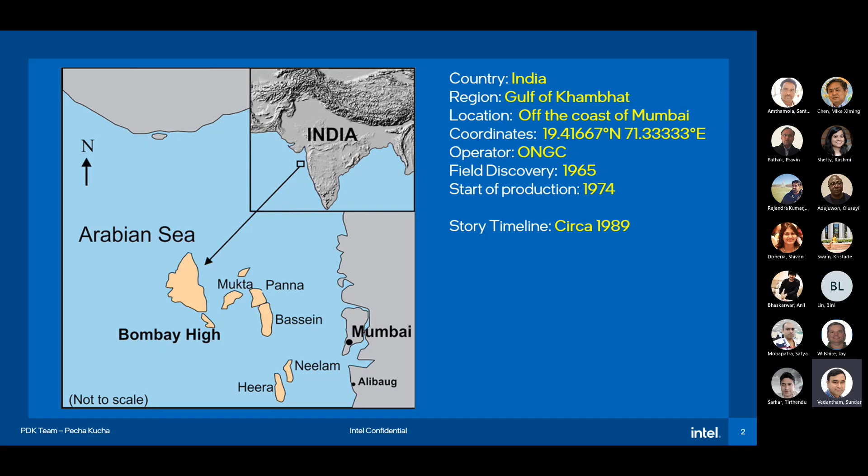Okay. So at the time, I was working for an oil and gas company in India called ONGC, Oil and Natural Gas Corporation, in an offshore oil field that's like 100 miles west of current Mumbai city. It was known as Bombay in those days, and so the oil field was called Bombay High Offshore Oil Field.

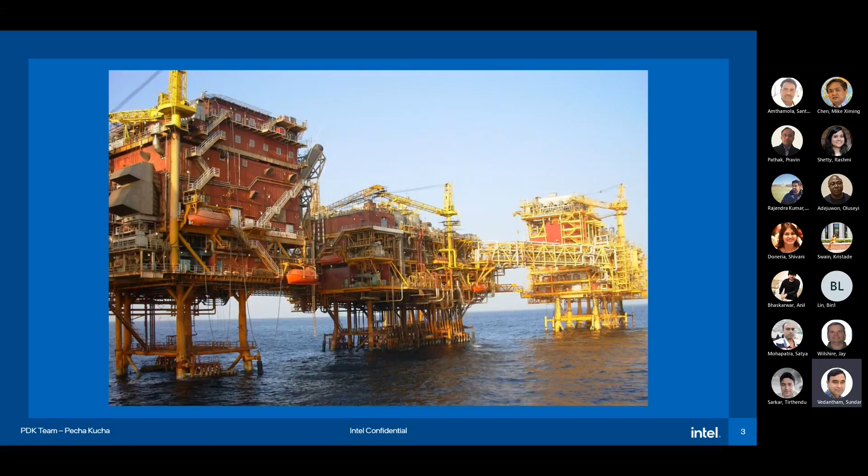Right, so a helicopter used to carry us from the Mumbai heli base on Fridays and drop us off on this platform. So about 100 of us used to live and work there for 2 weeks. It'd be like 12-hour shifts, so no Saturday, Sunday holidays. Then we'd get 2 weeks off so we can go home. So you might have seen these kinds of offshore pictures. They usually have a heli deck and then multiple blocks where engineers and workers live.

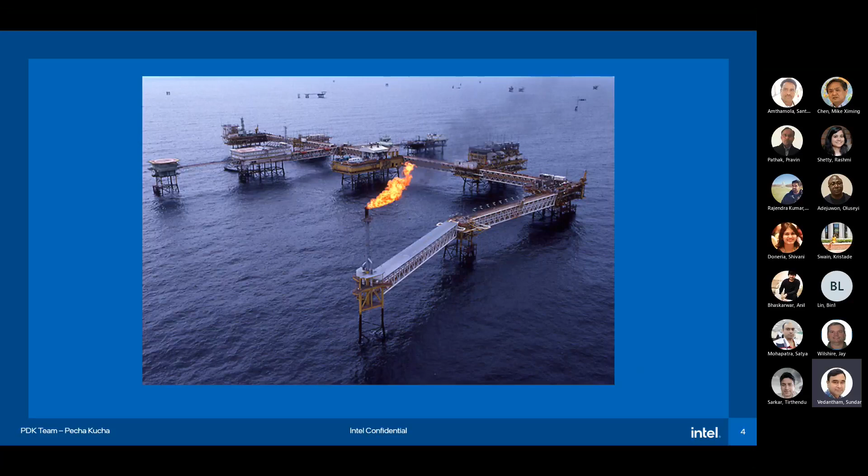And then as you notice, it'll always have a flare that continues to burn 24/7, burning a small amount of natural gas. People always wonder, right? So why do we waste this gas and can't we save and use it? But in reality, it's quite difficult and it's not cost effective. But another more important reason is safety, as it burns off small amounts of gas that collect in various stages. So it reduces fire hazard in the platform.

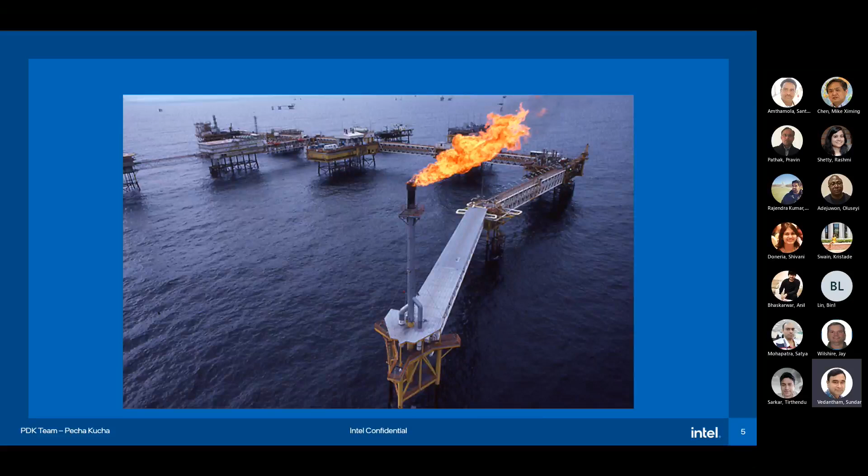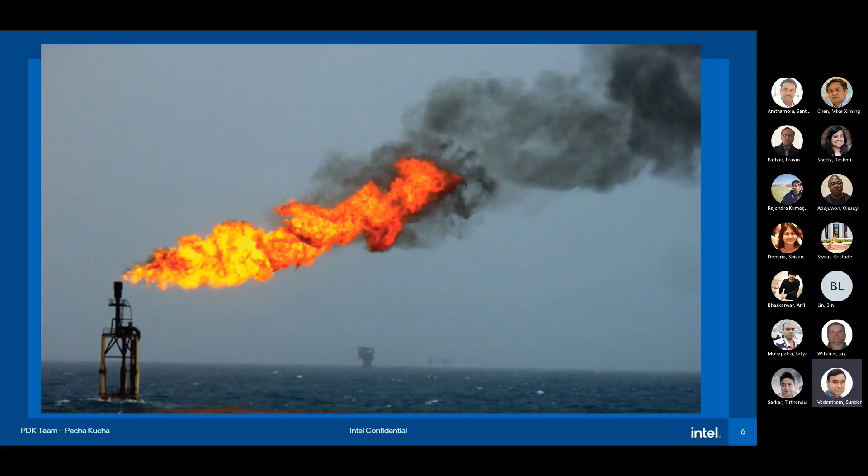And so in reality, we burn only less than 1% of the gas that is unearthed. And there are efforts in the industry to reduce it to zero by 2030. But during my days there, if the flame size is normal, that indicates all is well in the platform, right? So if it becomes too big or small, we'd immediately call the control room, since we were maintenance engineers, to make sure everything is running okay. So that's a sign that things are running well if it's burning normally.

So though it may not be obvious, the flare tip is rather big. It's like 10 feet diameter, right? So people do PhDs in these designs to make sure it's efficient, all gas burns off, there is no carbon residue dumped into the atmosphere, and so forth. So there's a lot of technology involved.

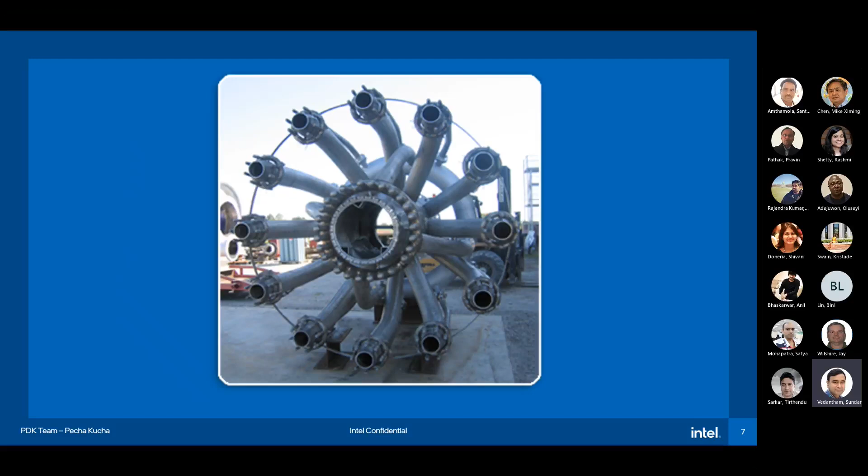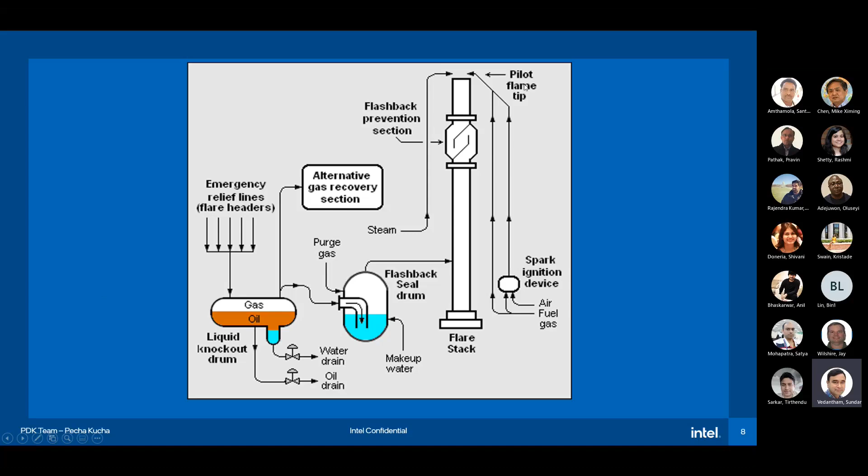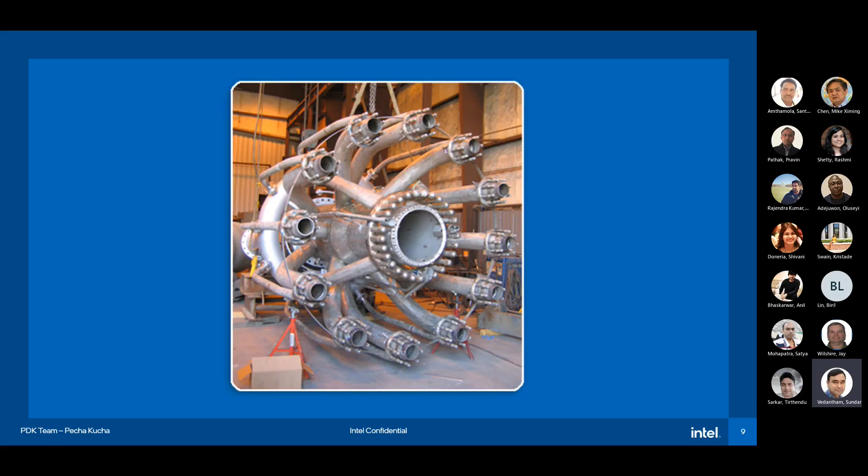So the platform is initially started, then the flare starts burning. There are supposed to be routine maintenance checks to make sure everything works well, pilot flame is on, triggering works, and so forth. But when I was there, slowly the flame started looking a bit odd. You can't really go close to check it out because it's too big, too far away. But when we were looking one day, suddenly the flame just went out.

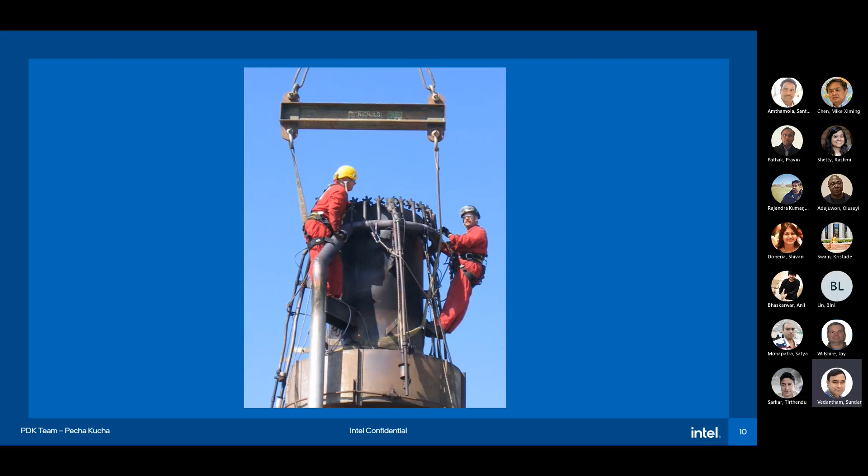Right? That's really dangerous, as you can imagine, because the gas started collecting around the platform. So the safety engineer got panicky. He was asking for our instrumentation team's help. We went to the ignition panel and tried starting it by triggering it. Nothing worked. And then we slowly realized after like 8 years of continuous burning, this tip was all burnt and had fallen into the sea. Right. So there is no way to actually start that thing.

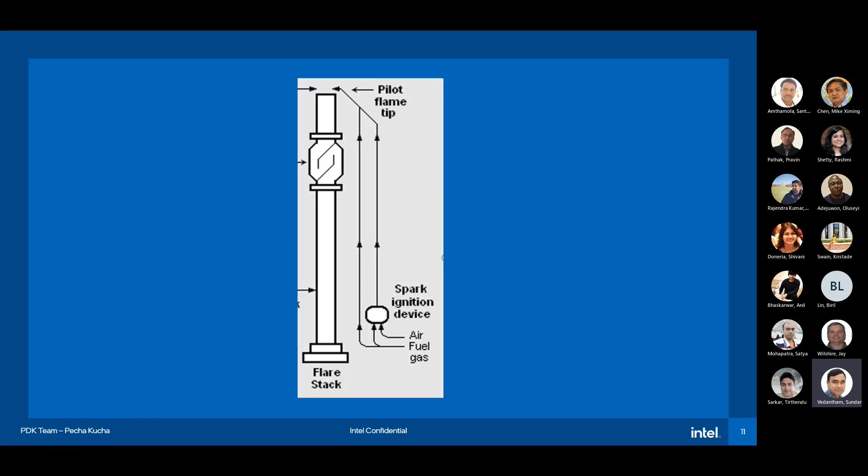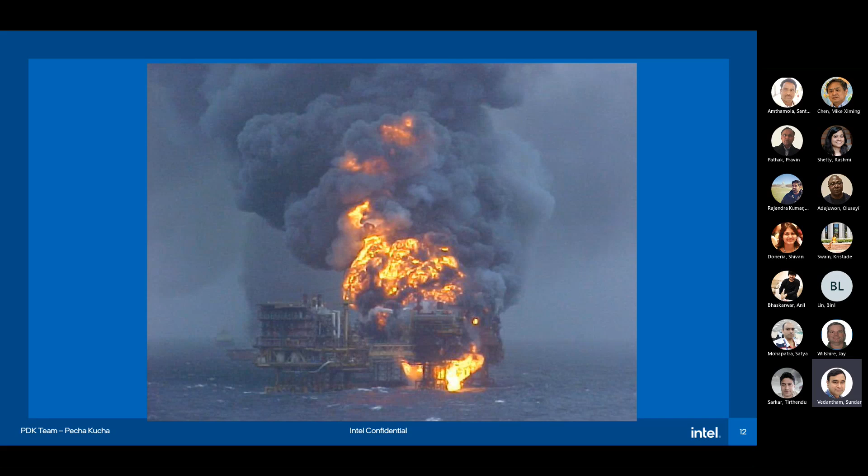But if we just leave it like that, gas can start accumulating around the platform, and some simple spark can just blow up the whole platform. Since it's full of oil and gas, it's like a sitting bomb. So engineers were kind of okay, but the kitchen staff, contractors, they all got really panicky and started yelling and saying we should abandon the platform and go back to Bombay. We didn't know what to do.

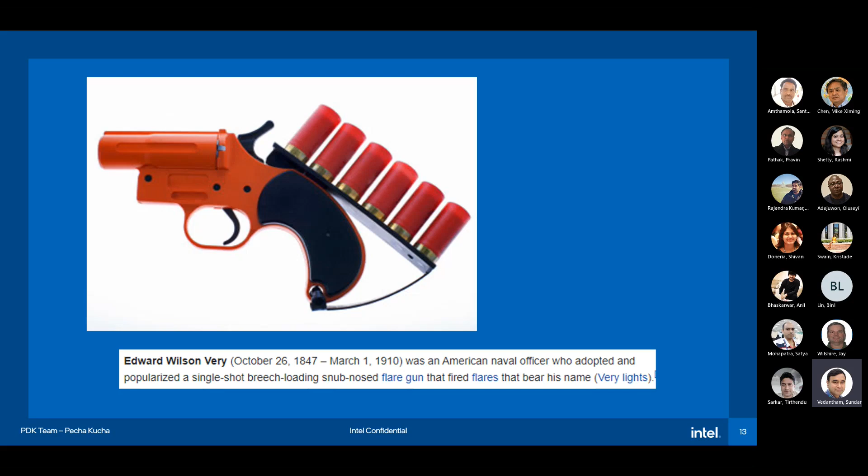Then finally, we came up with the idea of using this thing called a Very pistol to restart the flame. It's actually designed to shoot flares in emergency. It's not meant for restarting a burnt out flare stack. When we looked around, we figured nobody had fired this flare gun either. So since nobody had fired it, I thought I am as good as anyone else, right? So I volunteered to fire it.

And it's not appropriate to fire it from the platform. So we had to get on one of these boats, go close to the stack, and then fire it from there.

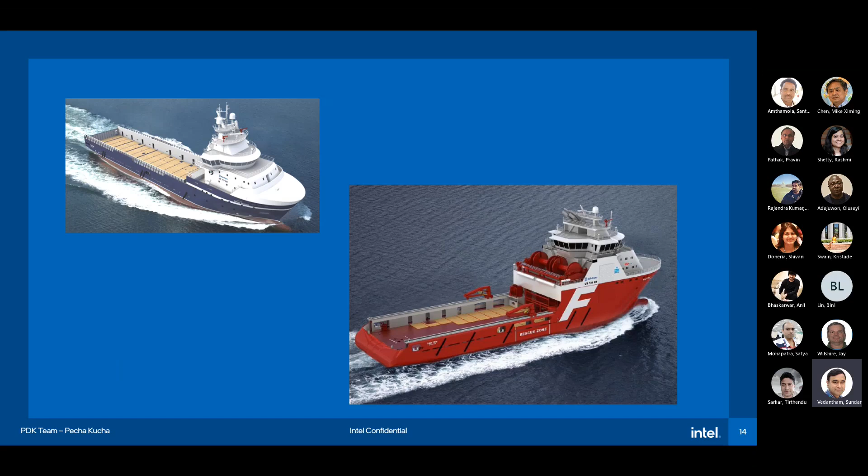And in these platforms, since we usually come through the helideck, there'll be no docking station for a boat or anything. So you need to get on one of these baskets, and then the crane will lower you down to the boat. So I clearly remember a colleague of mine called Gurudev Singh. And then the two of us got on and then got onto the ship.

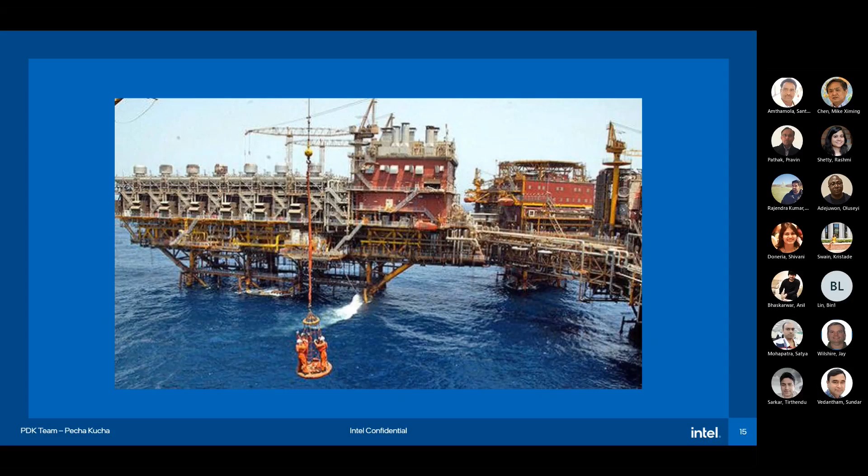So standing on the ship deck, I had a walkie-talkie, so I could talk to the control room. So the ship captain took us to the upper side of the wind flowing down from the flare, right? So I positioned myself, asked the control room to open a lot of gas. And then I just fired the gun. There were like 60, 70 people watching me from the platform.

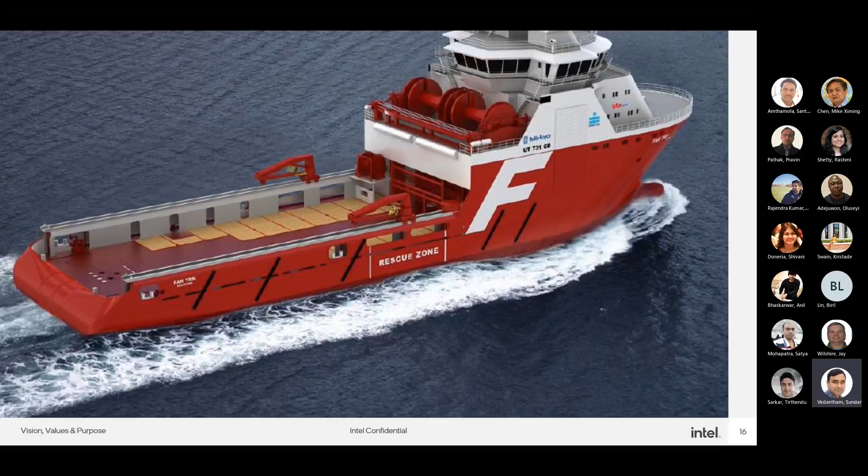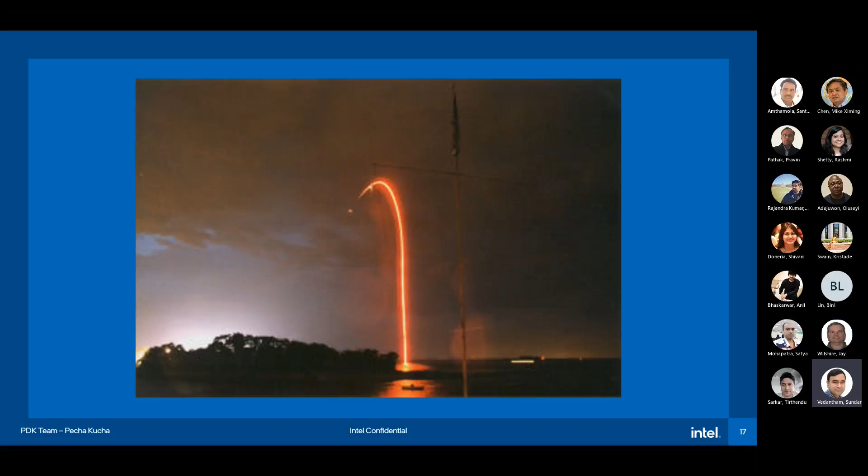Since it was kind of late in the evening and the sun was setting, it was getting dark, I can clearly remember that big sound like flat, and then the red kind of fiery line going sort of in slow motion, like from my hand to the flare tip, and suddenly with a very loud noise, the flare came back to life. So I heard a lot of people cheering and clapping for us from the platform.

So you can see where that boat is approximately. So this is the flare that went off. So we have to shoot from here. So when the control room adjusted the gas flow again down to normal level, it went away. So we had to actually fire a couple more times. And I think finally what Gurudev Singh fired, that's the one that kept the flame on. And we asked them to keep the flame going.

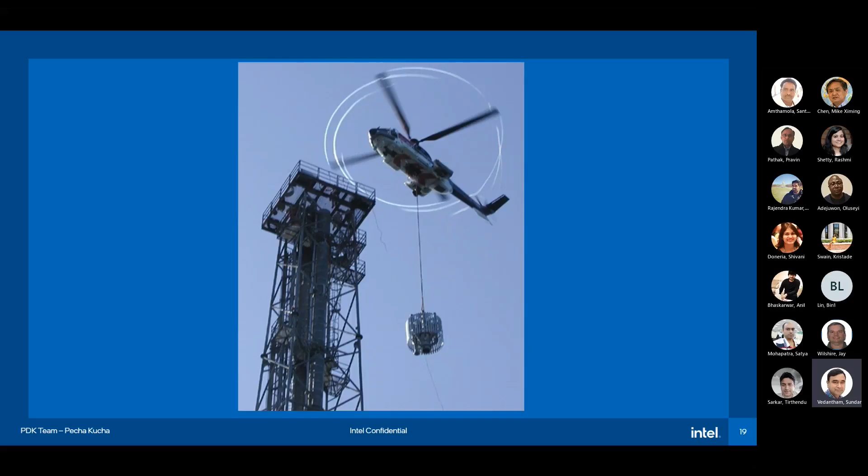When we returned to the platform, we were treated like astronauts kind of thing. Everybody cheering us for a couple of days. Then my shift got over, I went home. The company brought a replacement tip and mounted it from a helicopter. The next time when I went back, it was all well, and the flare actually even looked better than before.

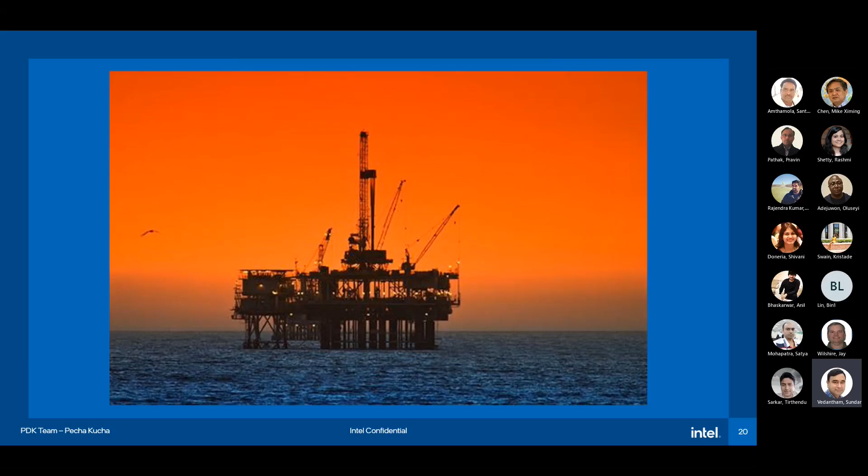So though the platform is inherently a dangerous place, offshore platforms are an engineering marvel, right? So I was like 22 years old at the time, so I had a bunch of such experiences that gave me a lot of confidence to kind of take risks without worrying too much about failure. Because in this case, if it had failed, okay, I didn't lose anything, but it worked out well. And so I was treated like a hero for a couple of days.

That was it. Wow, that's so great. It's completely like a cinema, like a movie. Very nice, very nice.

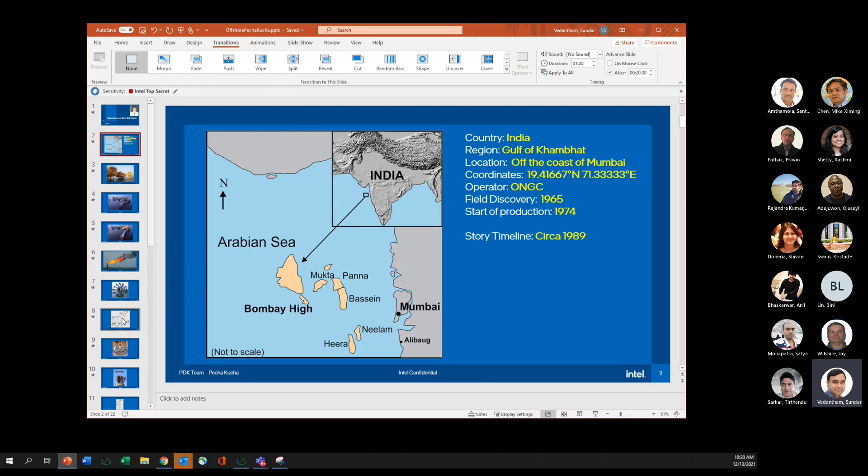Very good. So what I still don't understand is why do they have to have the flame? Is it because they have some residue they have to let out? Yeah. So actually, maybe I can now bring this and talk about it a bit more slowly. So in this one, right? So this is actually like a secondary knockout drum. So we can talk for hours. I mean, even this story, if I need to tell you properly, it would take like 20 minutes or something.

But the oil and gas, when it comes from the bottom of the ocean, it comes at about close to 2000 psi pressure, right? So there's a lot of oil and gas coming up. And we actually put it in some huge tank and let it settle where the oil and gas separates. Then there will be water that will get collected at the bottom. So we drain, clean, then we can pour that water back into the sea itself. Take the oil and pump it to the shore, separate the gas, and then put it into another pipeline that takes natural gas back.

As well, we use the same gas to run the compressors on the platform, to run the electrical generator. I mean, you can't run electrical wire from somewhere else to bring it here, right? And solar panels, all that is not enough because we are running enormous machinery, so you need a lot of power.

So when we do those kinds of things, everywhere there'll be some amount of gas that will become too low pressure to suck it up and pump it back into the main gas pipeline. That's too expensive and too complicated. It doesn't work very well. Plus, if you generally take all that gas and take it to this flare and keep burning it off, there is no residual gas anywhere, right?

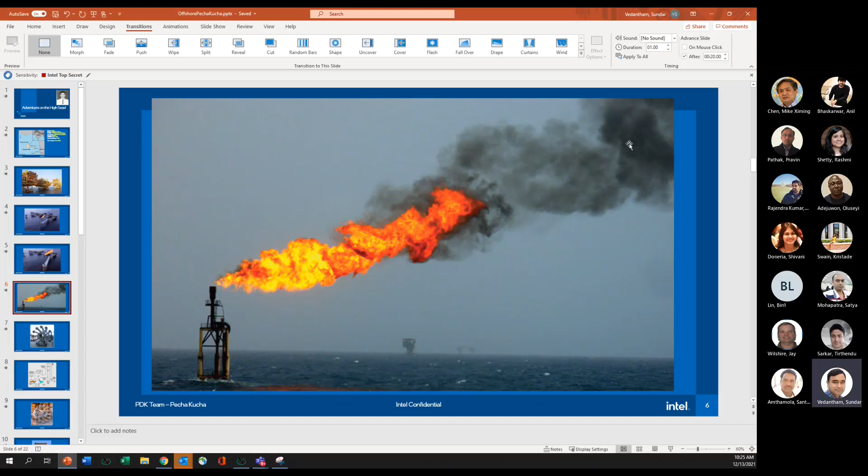And in those cases, instead of a 50-foot flame, it will become like 150 feet tall, a phenomenally big, powerful flame. Even if you are somewhere here, you can feel the heat suddenly coming in and the whole platform shaking because there is so much gas venting and firing off from there. Right? So maybe too long an answer for Mike's simple question, but I hope it gives some idea.

No, it's really interesting. So for all the gas, you've got a pipe to the mainland, right? Yes, yeah. So there were like 2-3 things going on. Actually, the way it works is, where is it? Maybe here. Yeah. So you can see some of these are additional platforms, right? If you're all interested, maybe on a Friday I can give a 2-hour talk or something.

There will be unmanned platforms. There'll be no people normally there, and there'll be like 10 wells like this, not sucking, actually collecting oil, because once you tap down to the floor, there is so much pressure that oil will just ooze out, right? It will just come up. And that will come to these platforms, from here, here, here, here.

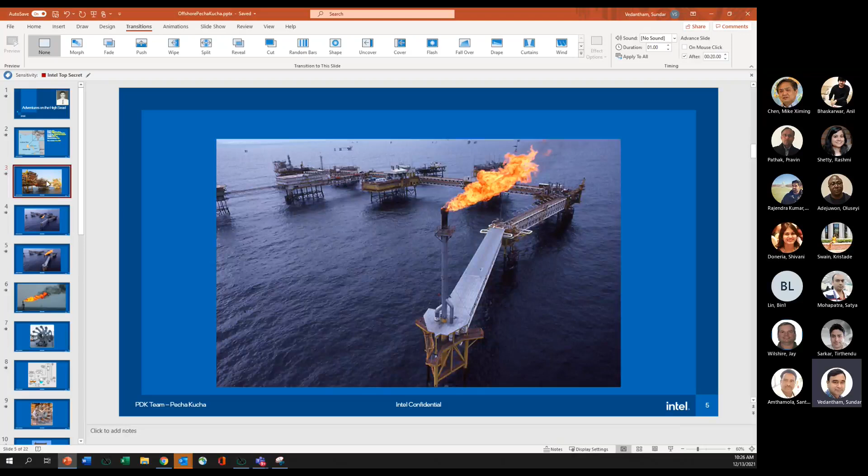So there'll be roughly 10, 12 unmanned platforms, each one with 10, 12 unmanned wells, right? So like 120 wells worth of fluid, a gas and oil mixture, will come to these kinds of platforms. Only here there'll be 100 people; roughly 40-50 are engineers, and the other 50 are maintenance staff, right? Kitchen staff, cleaning crew, all those kinds of people.

So the main function here is to get all that oil that's coming in through these pipes, and we'll take it in and then put it in huge tanks and separate out the oil, gas and water. Water is cleaned up and put back. Oil and gas, it will just pump back through submarine pipelines going back to Bombay.

So this is like 100 miles, right? So the sea depth is not that much. It's only about 220 feet. So on the seabed, they've laid 2 pipelines, one for oil, one for gas, that will go all the way to the refineries in the state of Maharashtra.

So of course, this is not the only platform. There were also other platforms. I think this was my platform. This is called SHP. So there were similarly like 4 or 5 other platforms. So each one will have like 120 wells getting oil in, and they are all collected in one pipe that will just connect back to the shore. But you can also get the oil pumped into tankers if you want. That was also possible.

Sundar, I have a quick question. Yeah. That means that you started your career in oil and gas. Why the transition, and what time did you want to move to IT? Actually, my undergraduate degree is in electronics and instrumentation, right? So after my graduation, my parents were not that well off to put me through grad school or anything like that. And in India in those days, it's not like you get a major scholarship to go to grad school. So I took a job.

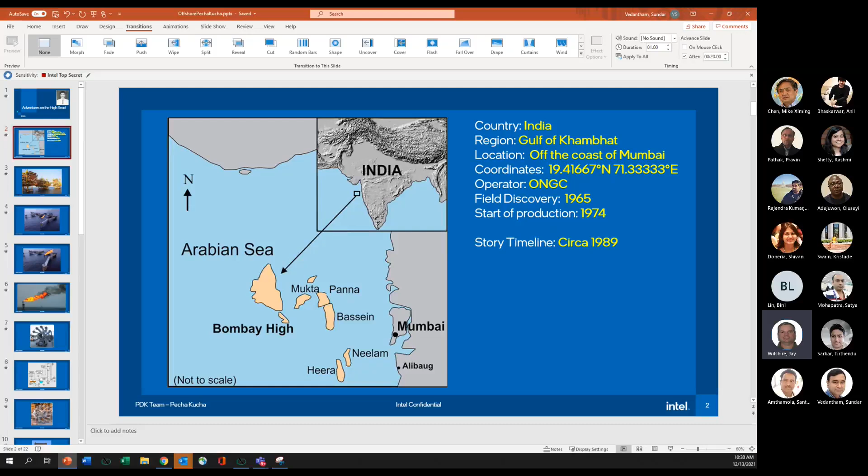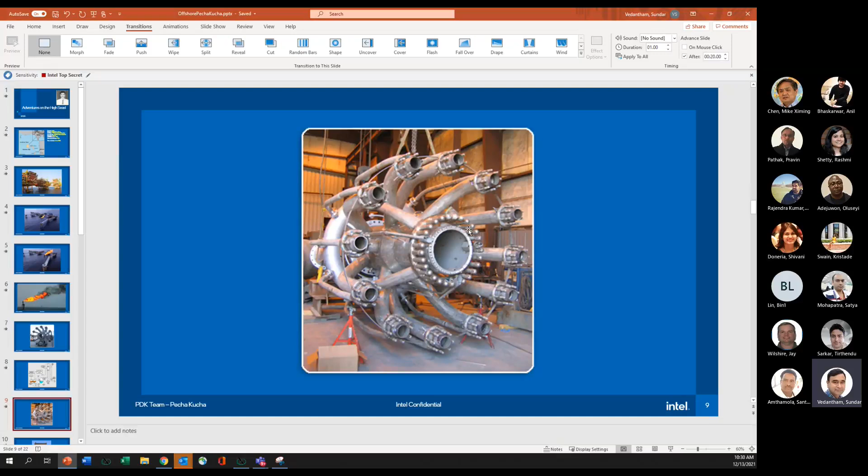Thank God for today. Hey, Sundar, slides 7 and 9, I wasn't clear, is that the top of the flare or the bottom where it's collecting? Yes, Jay. No, this is the top of the flare. Top of the flare. Okay. Wow. Yeah, these two. So this is the stem, right? So you should imagine this pointing up. So there's gas coming out from all these and burning off.

There'll actually be a steam line going in, because if the gas is just gas, it doesn't burn very well, and a lot of carbon may get deposited into the atmosphere. So there will be some steam added, and depending upon what kind of gas it is, it needs to be burned this way or that way. You need to have additives and all kinds of stuff.

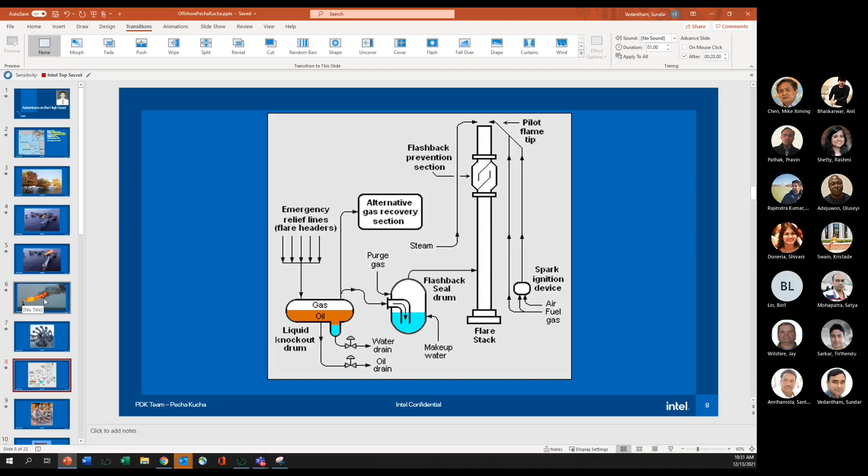Why don't you just burn it under the boiler, make the steam and make energy? Sorry, burn under what? They can just burn this flame under the boiler. Oh yeah. No, that goes on. Certainly that goes on. Even this one also, the extra one they are burning. Why not just heat up the water with that? Yeah, I mean.

As I said, the first reason is you need to have some way to burn it off if there is some sudden emergency, something shuts down, and a lot of gas backs up. And the second reason is there is a lot of little gas that gets collected. So if you just suck it up, this is considered very low pressure, even though for us it will look phenomenally big. As I said, when the compressor shuts down, the whole platform can shake, right? That kind of thing.

But compared to the pressure with which the gas gets pushed to the Bombay shore, this is nothing. This is a trivial kind of thing. So your question is valid, and it is getting done, right? People realize it's not a good idea to keep flaring it, so I don't even know if that much flaring goes on now. I need to go read up.

But by 2030, in all offshore platforms, they want 0% burning. They want to shut it down, even if there is some emergency. They want a different mechanism to suck that and put it someplace rather than burning it. And this is heavier than the air, isn't it? This gas. Yes. Yeah, so you can't leave it in the atmosphere either. Oh yeah. That's a very good point.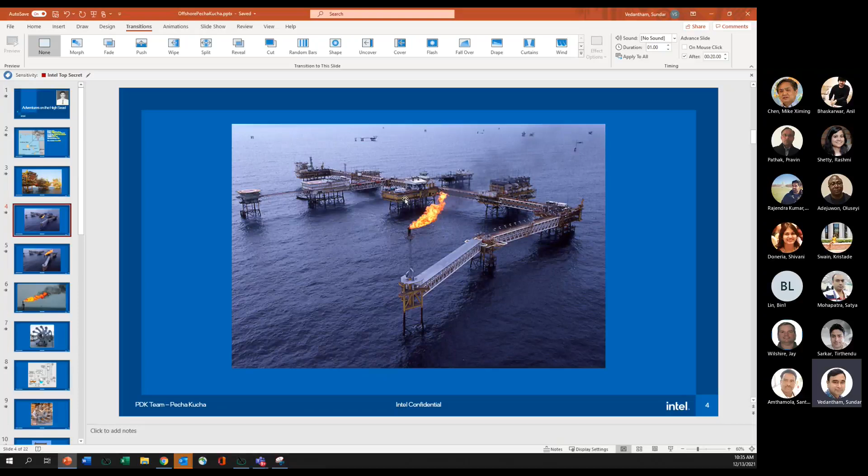It's all sitting there. So every switch, think of any electrical switch you have at home: you turn it on and off, it creates a spark inside, right? We cannot have that kind of switch anywhere outside. All the switches to turn anything on or off here need a hermetically sealed enclosure. So you can turn the switch on and off, say for a light, but even if there is gas around, the spark will not touch the gas to catch it. Things like that had to be done all over the place.

This area is living quarters, so it has to be positively pressurized, this is negatively pressurized, this is hermetically sealed. And in all the things we wear, we are not allowed to wear polyester, terylene, terry-cotton kind of things. We need to wear orange boiler suits. The main reason is, if there is any fire, it's cotton based, so it won't catch fire that easily. And if you fall down, the orange color shows up very easily, contrasting with the blue seawater, right?

And we need to wear steel-toed shoes all the time in case anything falls on them, and the sole needs to be a particular kind, so that if you accidentally kick something, sparks won't fly. I remember on the platform we were inside looking through a window once, and some guy standing there had a pen in his hand, holding it like a cigarette. Somebody ran, caught him, turned him around saying, "What the hell are you doing?" Oh, okay, it's a pen. Don't do that, man. There should be no fire or spark anywhere outside, because you never know where some gas may be leaking.

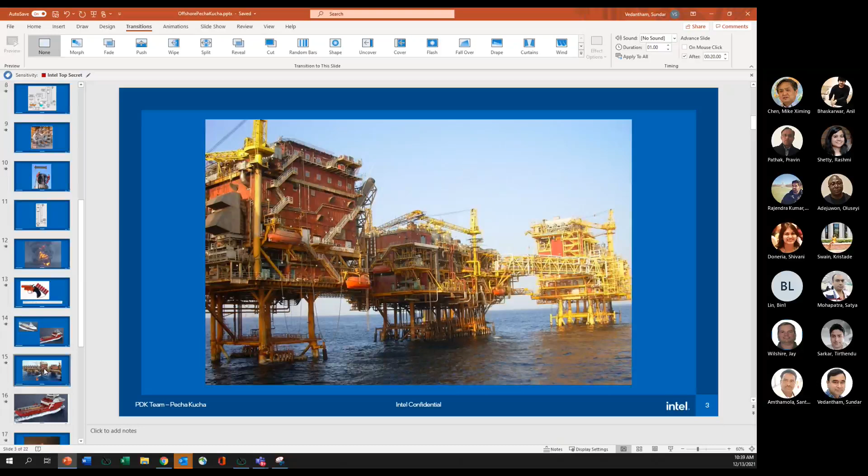This boat, right? So normally during daytime, if we need to go to any of the unmanned platforms, we'll just go to the helideck. A chopper will come and pick us up, right? They'll just go and drop us at the particular platform. We'll work there, and then in the evening it'll come and pick us up and bring us back. But all the choppers will go back to Bombay around 5-6 o'clock in the evening. They don't fly after sunset.

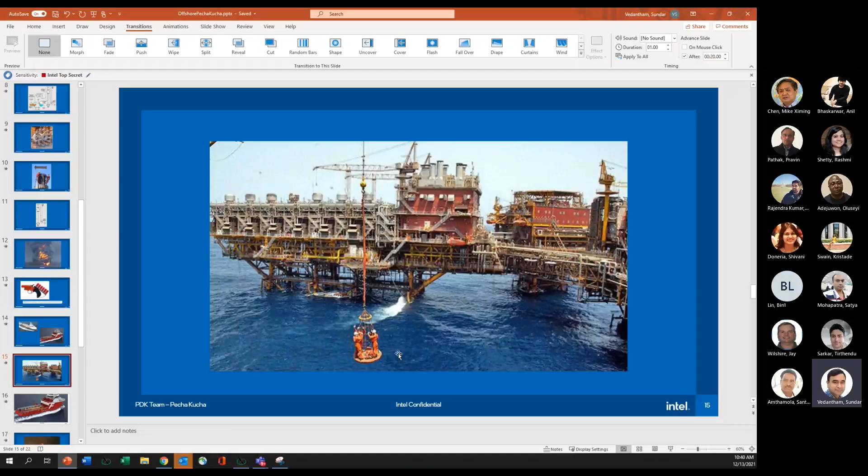Okay. So anytime we need to do anything late at night, production is so important, right? So in the middle of the night, if one of the unmanned platforms stops pumping, the oil flow stops, they won't say we'll wait till tomorrow and go check it out. It's urgent, an emergency. So we'll be woken up from our bed and we need to go in the middle of the night, jump on this basket, get on one of these boats, and the boat will take us to the unmanned platform. And then we need to somehow debug, figure out why the hell the platform stopped pumping oil, and then get that working again.

So that's what I described in that story. But never inside the thing. Once the rig comes in, they set up the well, all that. We never ever go below the water level. There was no reason to; we always operate above the water level. Okay.

All right. I'll keep talking forever because that's one of my fun topics. It's very interesting. Really interesting. Stop recording.